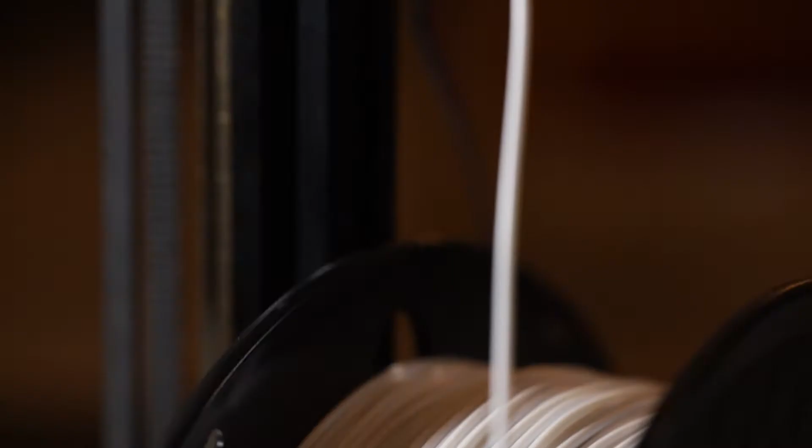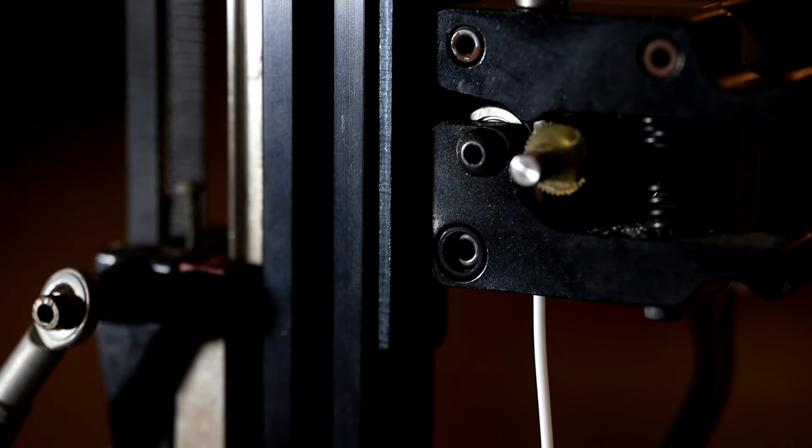When beginning the design process, our first decision was to make the plane body out of 3D printed parts. This was due to a multitude of reasons. Firstly, 3D printing the plane body allows us to replace parts with relative ease, and this really came in handy during the testing process. Secondly, this allowed us to customize our airplane's characteristics by getting really accurately reproduced parts such as the aerofoil and the body shape.

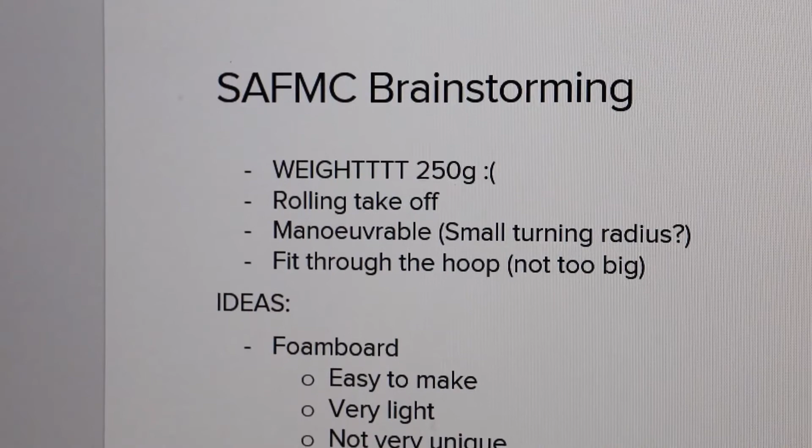Lastly, lightweight PLA could be used to 3D print out a foam-like material, allowing us to have all the benefits of 3D printing whilst still having the benefits of more traditional materials. Of course, we didn't decide on our current design immediately. We ran through many ideas and took the challenge requirements into consideration before finally choosing our current design.

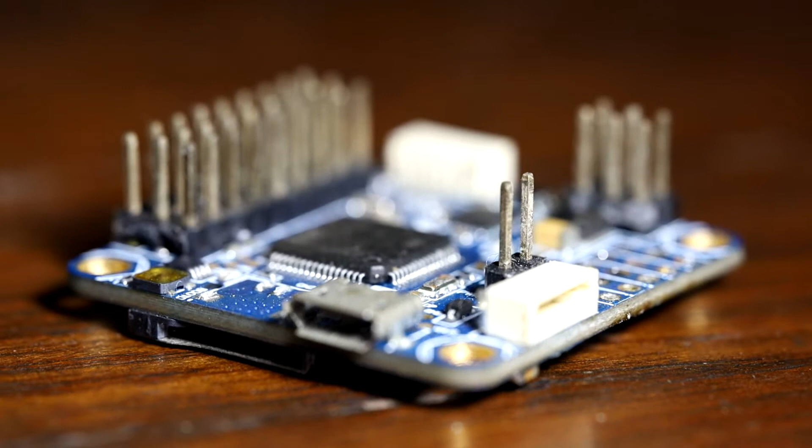In order to achieve good control over the plane, we needed the plane to be stable. This was done by firstly using a flight controller with an inertial measurement unit that can detect unintended deviations in the plane motion, and then proceed to correct these variations automatically. We also added some wing dihedral for increased roll stability, as rolling to one side will generate more lift on that side, thus countering the roll.

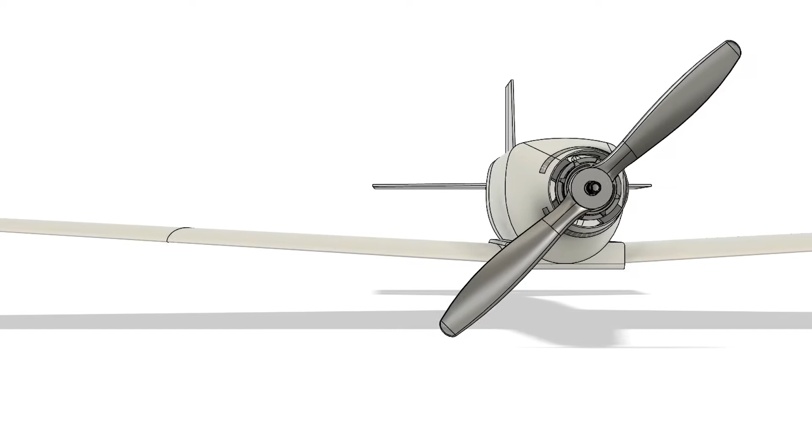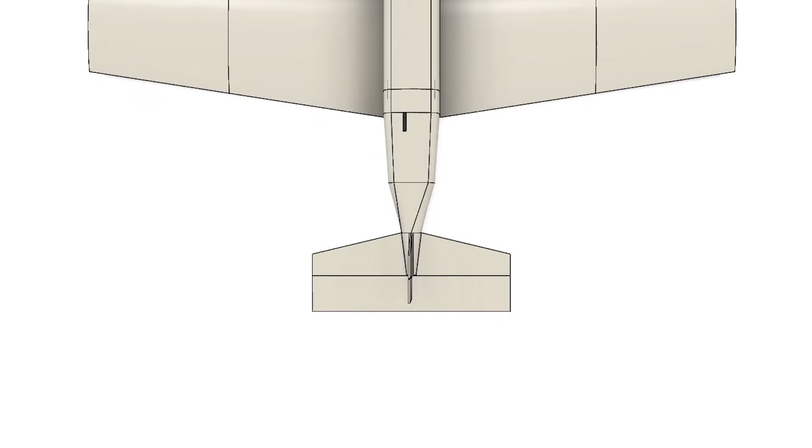However, we did not give the wing too much dihedral as it can affect the maneuverability of the plane, and the flight controller already served to counter the instabilities of the plane. Thus, our aircraft wings are moderately angled upwards. Our wing has a moderate aspect ratio. This is to balance the positives and negatives. High aspect ratio wings have low drag at low speed, but low aspect ratio wings allow our plane to be more maneuverable due to the lower moments of inertia and require less support due to a lower bending moment.

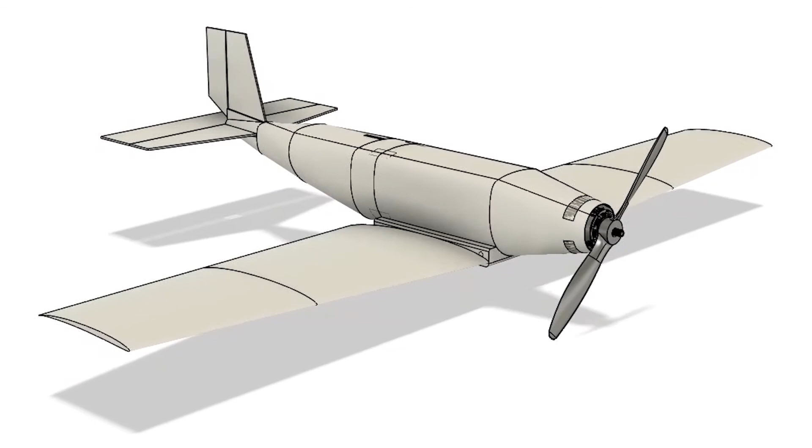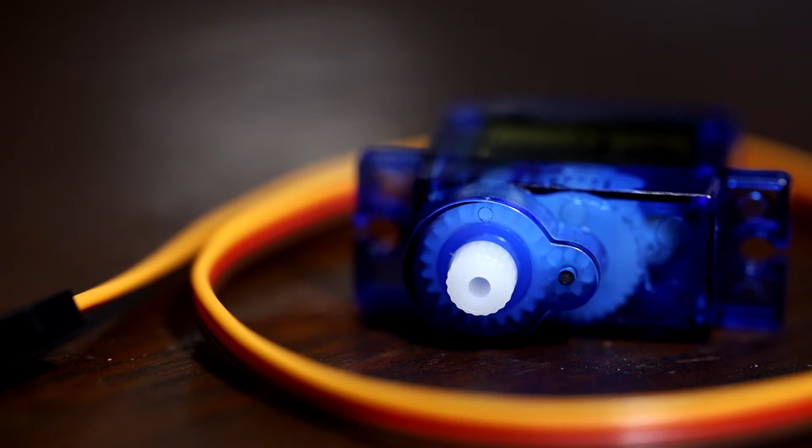The extra space due to our aircraft's size was utilized to house 4 control surfaces, namely a rudder, elevator, and 2 ailerons. They were made to be as big as possible to allow reliable and accurate control of the aircraft to allow us to more efficiently navigate the obstacle course. The servos used to control these control surfaces are small 9-gram servos, as they are strong enough for our target speed yet decently lightweight. The drawings were then digitized and used as a reference for the final 3D model in Fusion 360, allowing for testing and 3D printing of the plane.

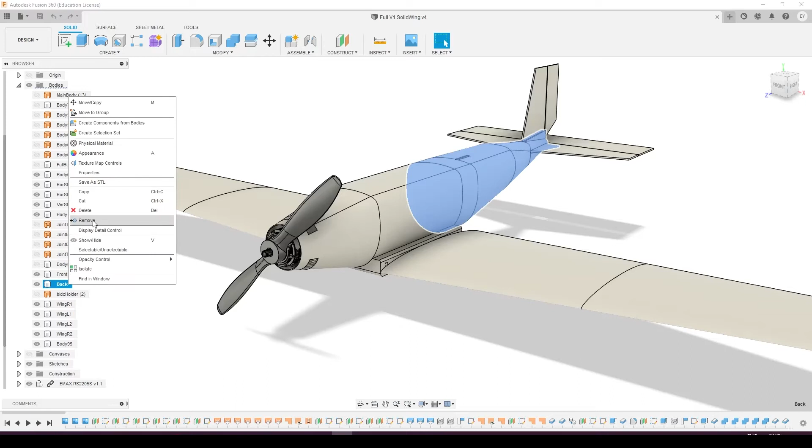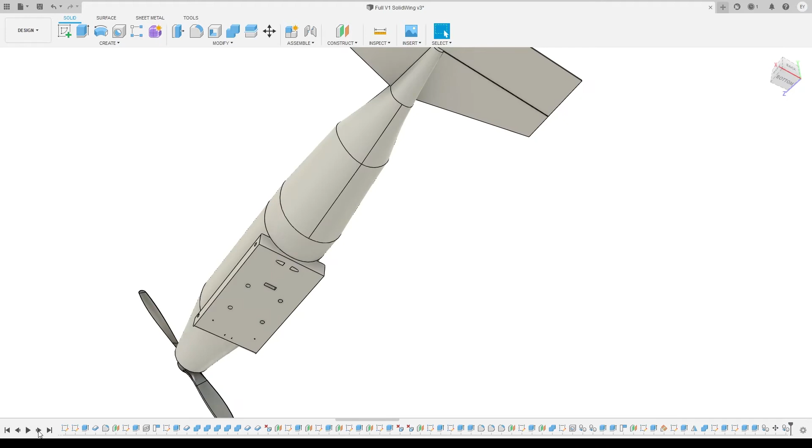As our aircraft will be fully 3D printed, the material weight can be very accurately calculated from the 3D model. We then made changes to the design of the aircraft to keep it under the 250 grams limit of the competition. Using the 3D model also allowed us to determine the center of gravity, or CG, of the plane in software. The components of the plane include the servos, flight controllers, and battery, and they can be shifted around inside the plane such that the CG of the plane is in line with the center of lift of the plane, giving us good, easy, and effective control of the plane using the control surfaces.

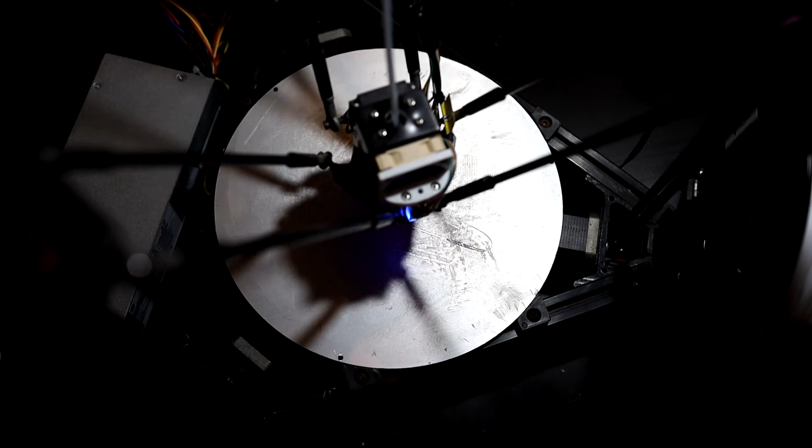We then printed all the components of the plane body. We assembled the plane using glue to attach the different components of the plane body together, and tape to attach control surfaces. A few iterations of the aircraft were 3D printed and constructed, as several small details had to be updated in the design to allow for the best final product, highlighting the benefits of using 3D printing. We then wired everything up and programmed the flight controller to understand the layout of the plane.

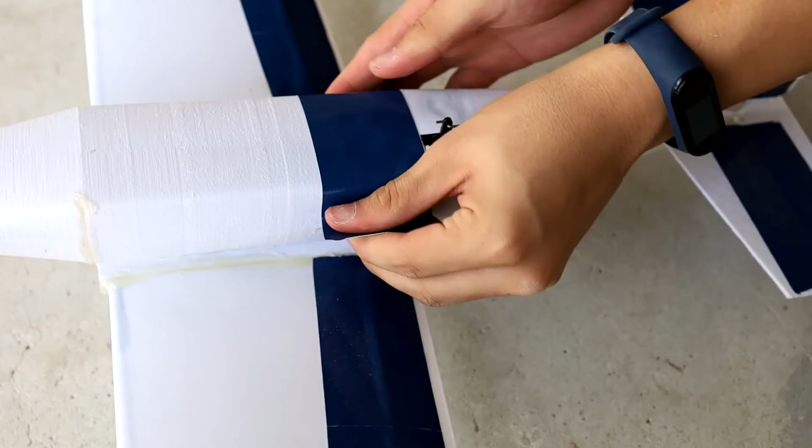Our plane crashed many times throughout the testing and suffered considerable damage, but the replacement plane parts were easily 3D printed. During testing, we encountered a problem with the design, which was the landing gear. Our original design was a tail dragger design, but this caused the plane to become very unstable in the yaw axis when accelerating for a rolling takeoff. We then switched to a tricycle design, which allowed us to have more reliable and much straighter takeoffs.

Our plane is a testament of how the most cutting-edge technology, such as 3D printing, can be used to create something which could not have ever been dreamed of 50 years ago. A key takeaway from this project will be the concept of rapid prototyping using 3D printing. We are now one step closer to connecting with the heavens, once again showing off the spirit of human ingenuity and our will to never give up.